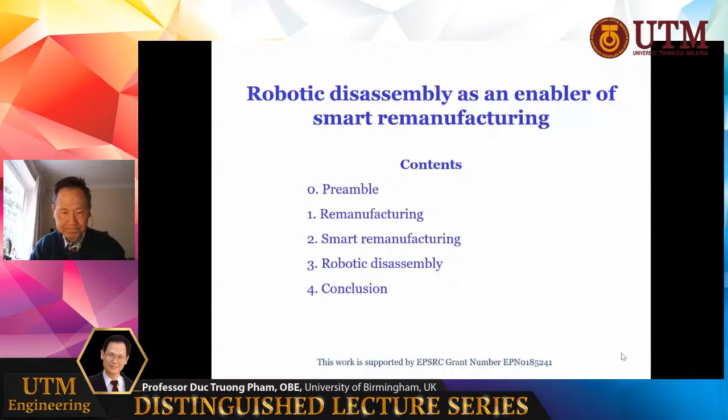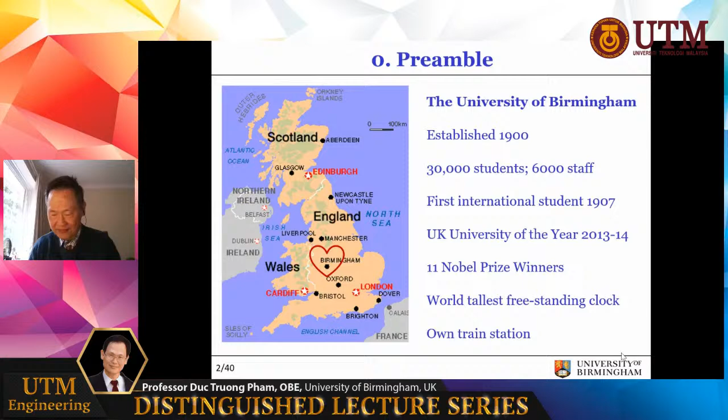So, what is remanufacturing? It is one of our areas of focus because it is a very important area. According to the British Standard, remanufacturing is the process of returning a product to at least its original performance.

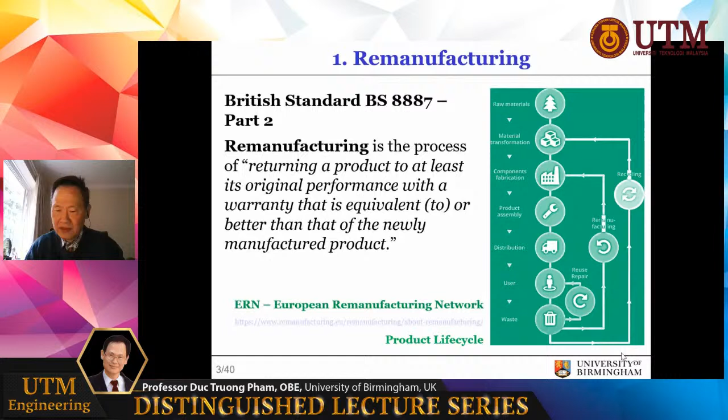Remanufacturing is part of a circular economy, as can be seen in this diagram, which shows remanufacturing forming one of the loops of the circular economy. We are familiar with refurbishing and reconditioning, but remanufacturing is different. Whereas refurbishing is largely aesthetic and reconditioning is about restoring a product to working order, remanufacturing delivers a product that can be considered as new.

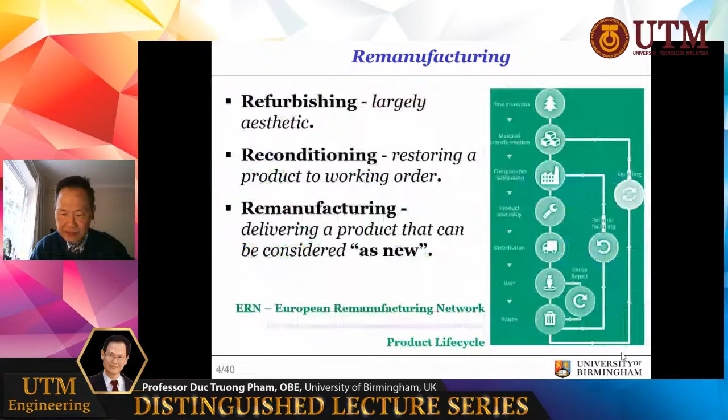Why do we want to do remanufacturing? We want to do remanufacturing because it saves a lot of energy, it saves materials, and it also avoids landfill.

I had a slide, I don't know why it skipped, let's go to the next slide, which explains what remanufacturing consists of. So remanufacturing is a chain of operations. We start with the end-of-life products. We take it apart before we can do anything to it, we have to disassemble it. Then we clean all the components that we have disassembled. We inspect them and we repair those that can be repaired, or we replace those that cannot be repaired. Then we reassemble the product, we test it, and then we have our remanufactured product.

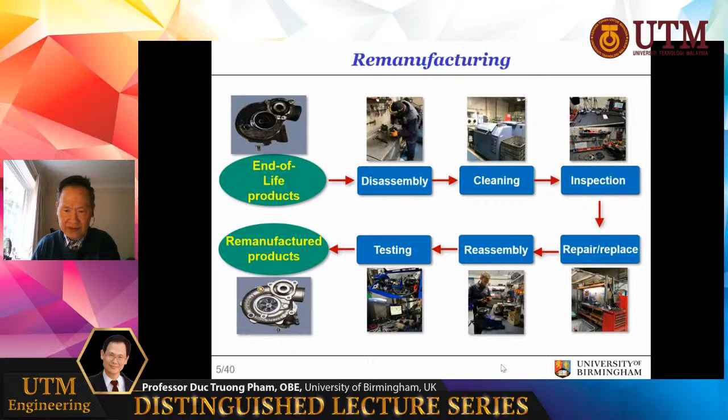So here, this is the slide that was missing. Remanufacturing is very advantageous because, as you can see here, for Caterpillar, who is our industrial partner, remanufacturing cuts down greenhouse gases by 60%, cuts down water usage by more than 90%, cuts down energy use by almost 90%, and cuts down raw materials usage by 90%. What is even more impressive is it cuts down landfill by more than 99%.

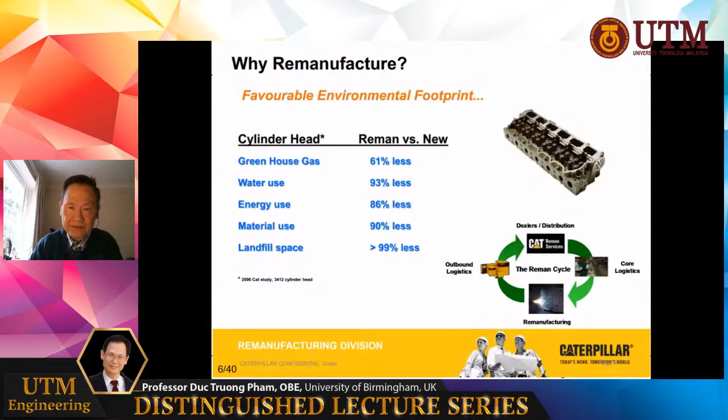Another common problem is uncertainty. This picture shows uncertainty in the condition of the product at the end of its service life. There are other uncertainties, as we shall see later. To overcome uncertainties, we need smart remanufacturing.

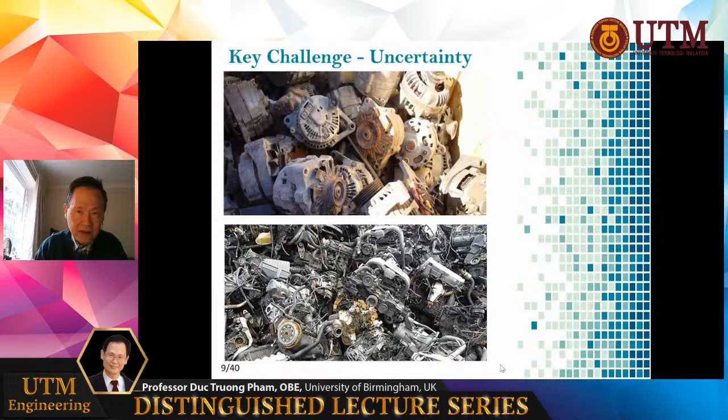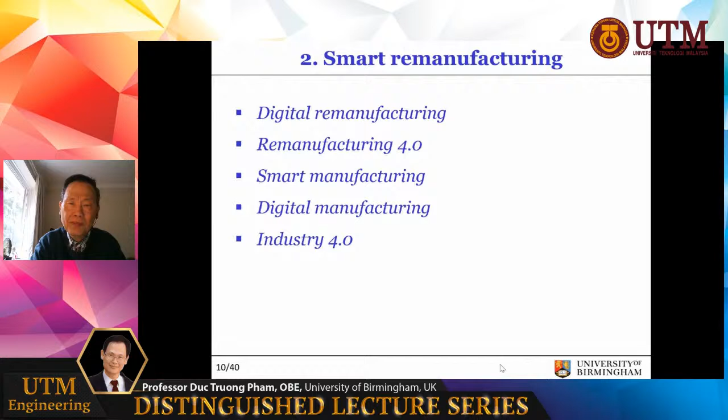Now, you are probably more familiar with smart manufacturing and digital manufacturing, but we also have the equivalent in remanufacturing. So we have digital remanufacturing and smart remanufacturing. Another name for smart remanufacturing is remanufacturing 4.0. As you can see from that name, it is about using Industry 4.0 technologies to make remanufacturing smart.

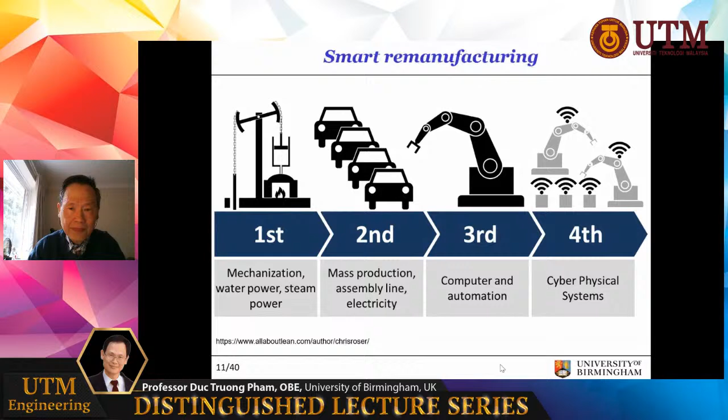So, what are the technologies involved in smart remanufacturing? In fact, they are technologies of Industry 4.0. You will see they include sensors, autonomous robots, cyber physical systems, and the Internet of Things.

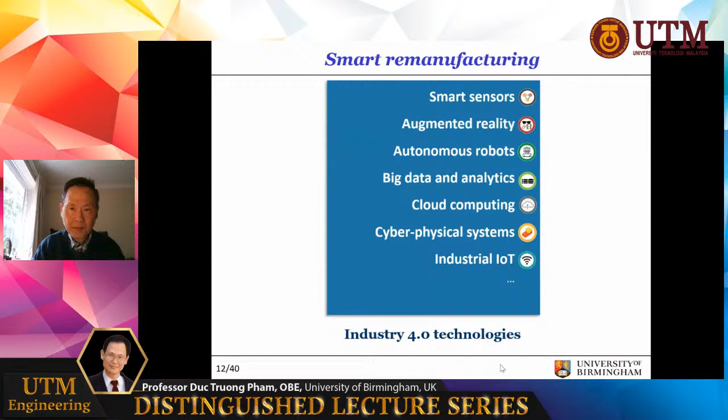So, here are some of the uncertainty problems in smart remanufacturing. They are uncertainties with the supply of the end-of-life products and in the demand for them. There are also operational uncertainties caused by the variable conditions of end-of-life products. Sensing, monitoring, prediction, together with communication and big data and machine learning, can help overcome problems due to those uncertainties.

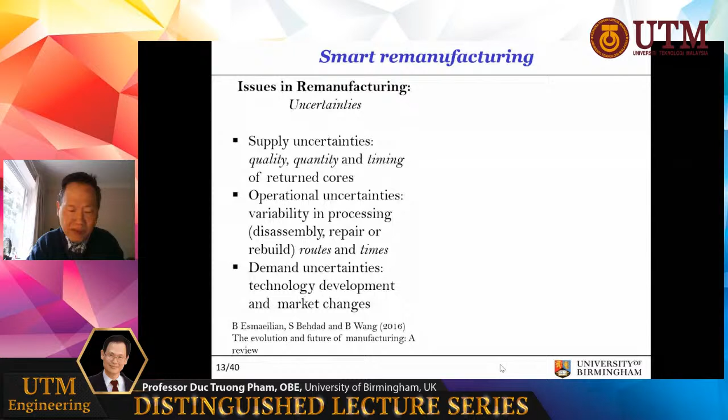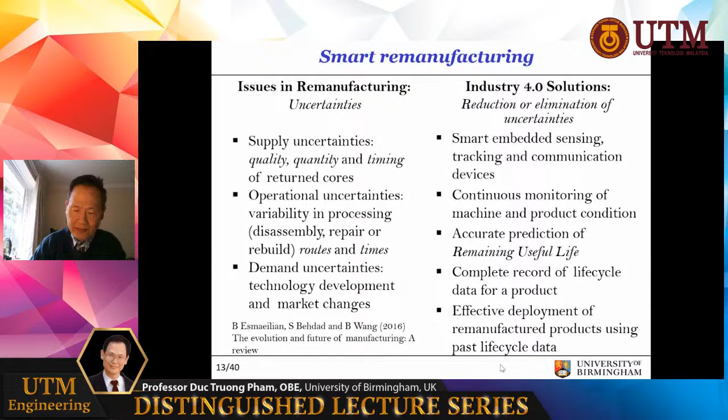So these are the techniques, and you recognize them as Industry 4.0 techniques. There are further issues with remanufacturing, not only uncertainties, but there are these small production batches. So batches sometimes of one made to order, that is not uncommon. Also complications with materials management and resource planning, complex shop floor scheduling and control, and so on.

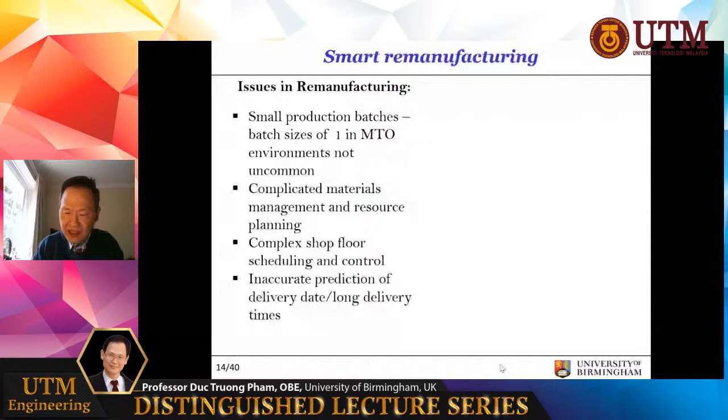And again, we see that technologies of smart automation, smart sensing, and accurate modeling and prediction, these technologies can help overcome problems in remanufacturing and make remanufacturing smarter.

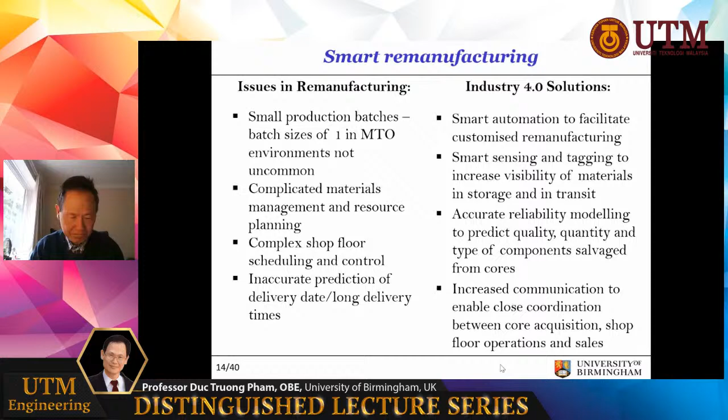This slide summarizes the links between Industry 4.0 and remanufacturing to give smart remanufacturing.

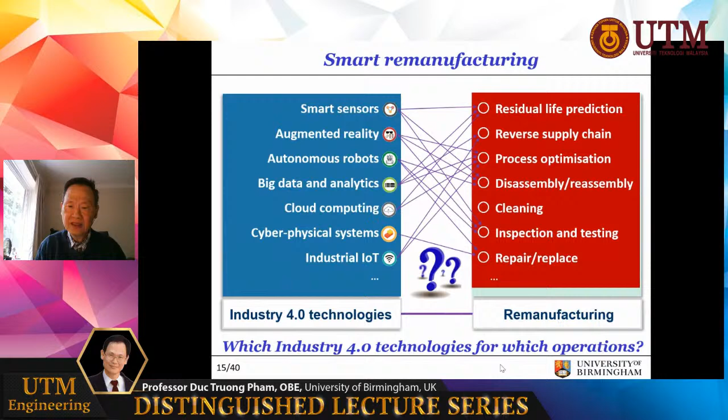The left-hand side lists all the key Industry 4.0 technologies, and the right-hand side lists the areas of remanufacturing that can be made smarter. By applying the technologies on the left-hand side to the problems on the right-hand side, we create smart remanufacturing.

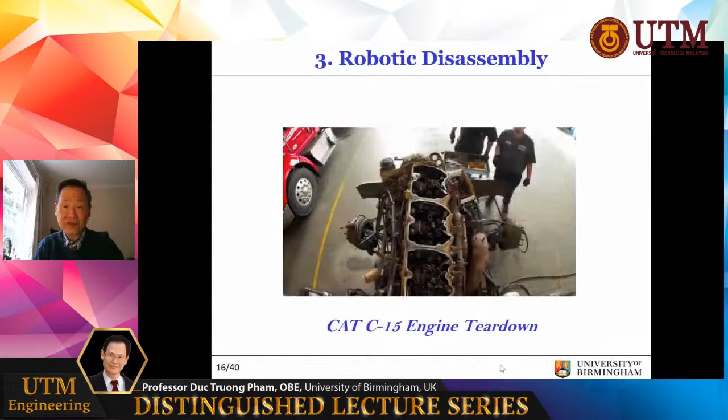Here is a little quiz for you. What does this slide, which comes from Caterpillar, show? It shows the disassembly of an engine at Caterpillar. What does this slide imply? What does it show?

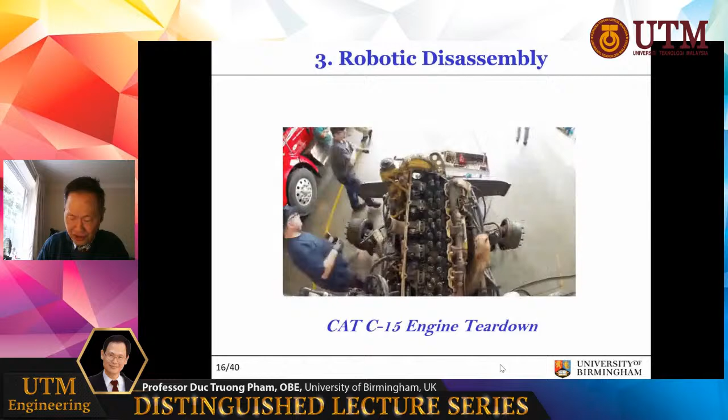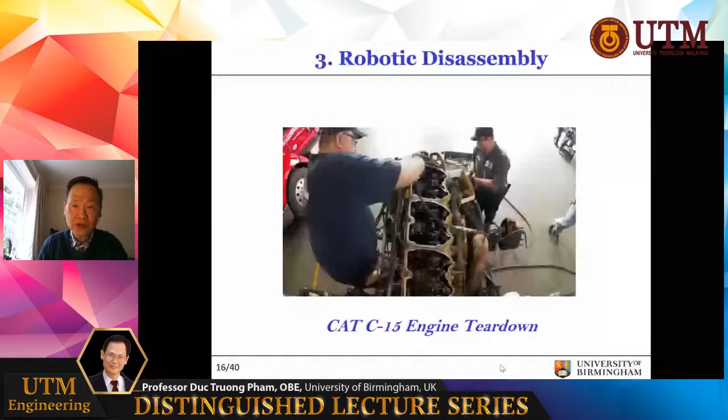Yes, you are right. It shows that disassembly is very labor intensive. It is costly and represents a major obstacle to widespread adoption of remanufacturing because of the cost of disassembly, the difficulties involved, and the problems that require human intervention.

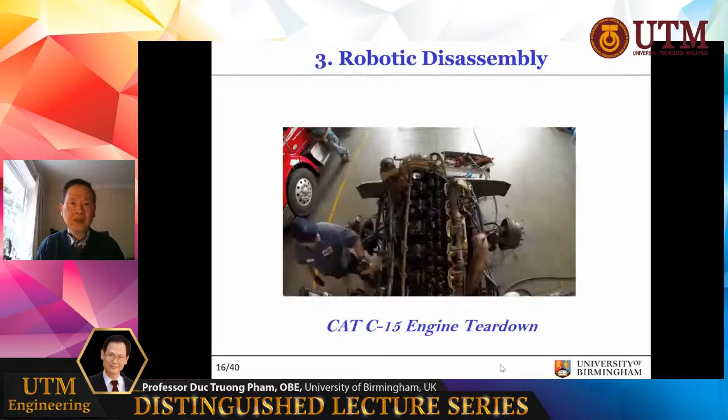So we have been focusing our efforts on this problem of robotic disassembly, in order to create robotic disassembly systems and address this bottleneck in remanufacturing.

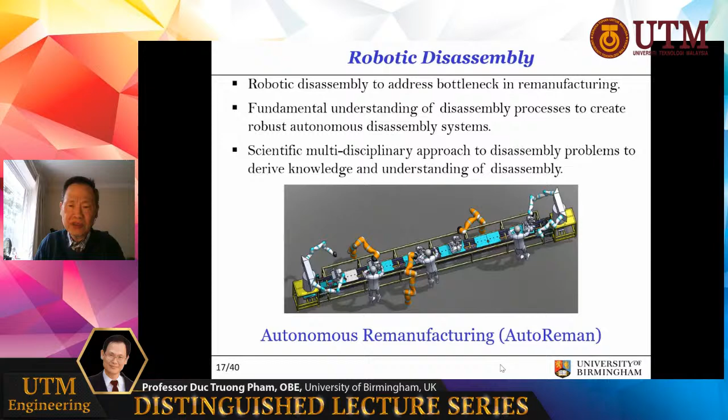We want to understand disassembly processes fundamentally. Our aim is to create robust autonomous disassembly systems that are reliable and can work without fail. Our approach to this problem is to adopt a multidisciplinary approach, involving manufacturing engineering, mechanical engineering, electronics engineering, computer science, and data science, in order to understand the problem and devise solutions to them.

So over the past 5 years, we have studied disassembly science. We study the fundamental disassembly processes to determine the patterns recurring in disassembly problems and the physical and cognitive efforts required to solve them.

With our understanding of disassembly, we devise practical strategies for carrying out disassembly. We also work with partners at other universities abroad on disassembly planning, aiming to develop optimal plans for disassembly in order to save time and cost.

We also realize that disassembly is a complex process. Not all of it can be done by machines, so there is a need to involve people in some cases, and for people to work together with machines. So we have been looking at collaborative disassembly.

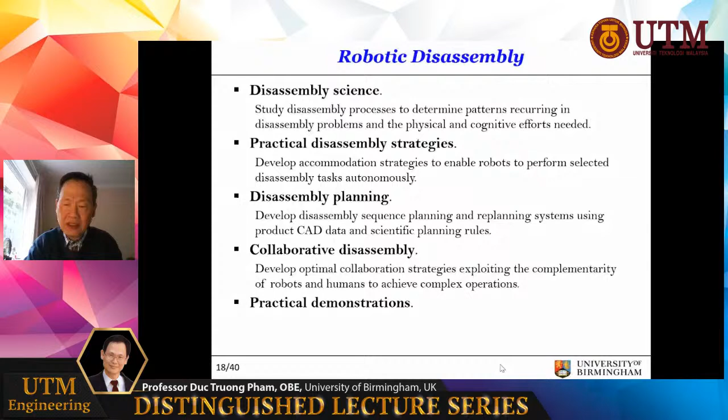And in our work, we have developed practical demonstrations. I'm going to go through all these 5 points. This next slide shows the 5 points again, but in diagrams and pictures.

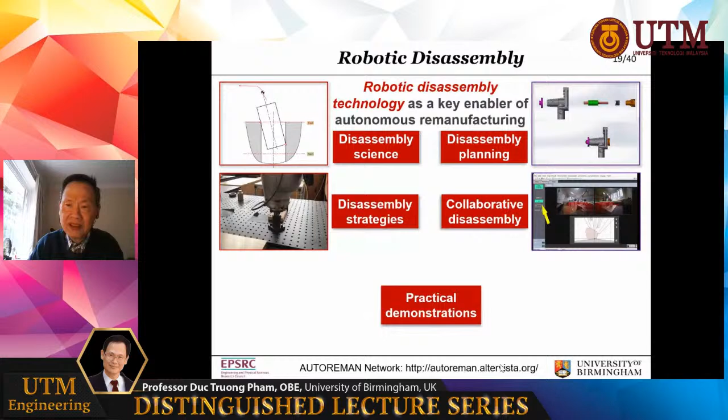Here we look at disassembly science, such as how we remove a pin from a hole or how we undo a screw. We look at disassembly strategies - after we understand the mechanics of the process, we can devise clever strategies for machines to perform them. We look at disassembly planning with our partners at other universities in Wuhan, Spain, and Beijing. We look at collaborative disassembly involving people and machines, and then we implement a number of demonstrations.

So for the rest of this talk, I will describe these various activities.

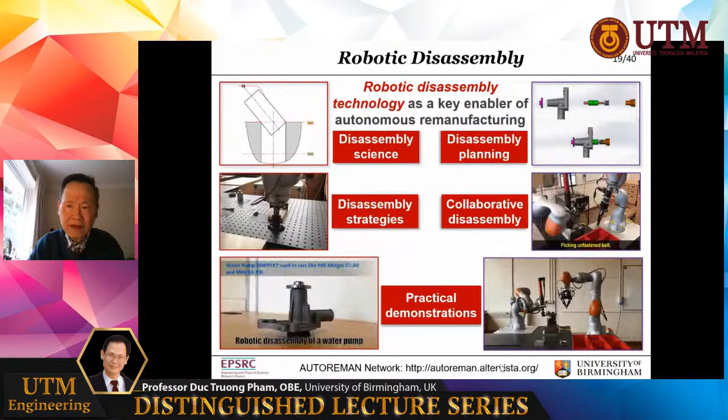Before we carried out our research, we examined a lot of products to find the common disassembly operations. We studied over 400 products and found something like 12,000 operations, which we classified into broad classes. We found that about 40% of them involve unscrewing.

Another 20% involve taking a pin out of a hole - pulling something from a hole. So about 60% are these fundamental processes, and another 40% are different miscellaneous separation processes. We focus our efforts on the 60% of the operations.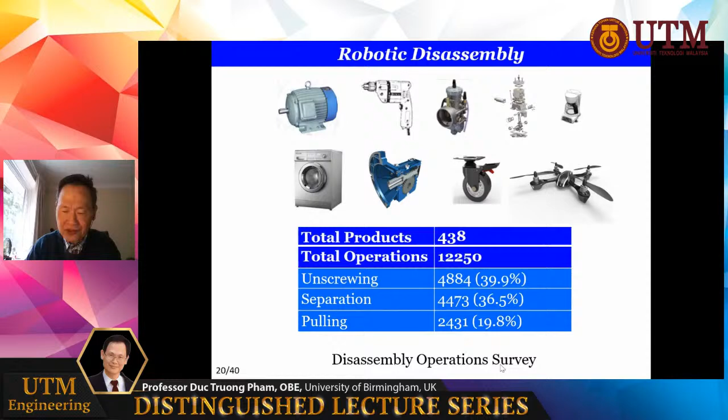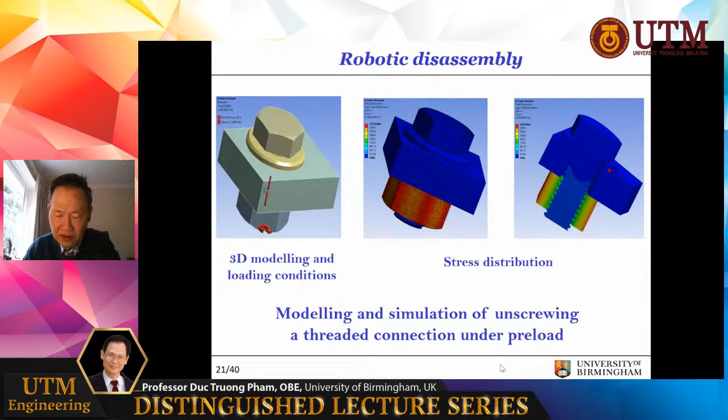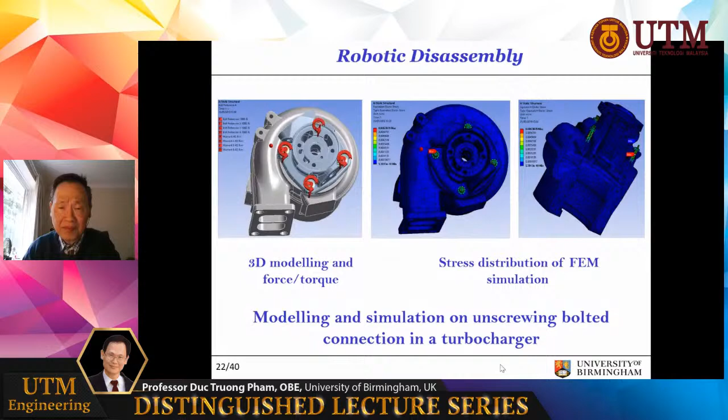We study robotic disassembly of unscrewing operations, using finite element modeling to study the fundamental unscrewing processes. We also looked at the unscrewing of real products like this turbocharger, again using finite element analysis and experiments.

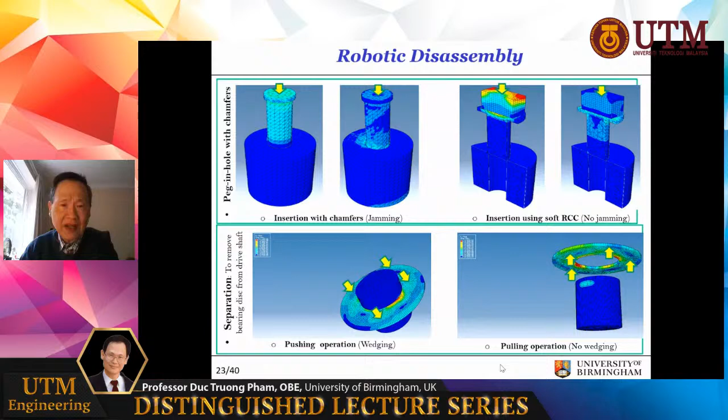We look at the removal of a pin from a hole. This is an interesting operation. When I did my PhD, I studied how to put a pin into a hole; now, many years later, I look at how to take a pin out of a hole. Our colleagues have been studying this process fundamentally, looking at the mechanics of it and also the finite element analysis of the process.

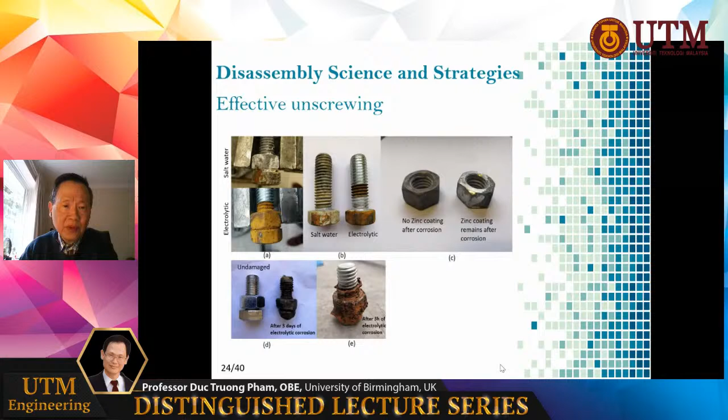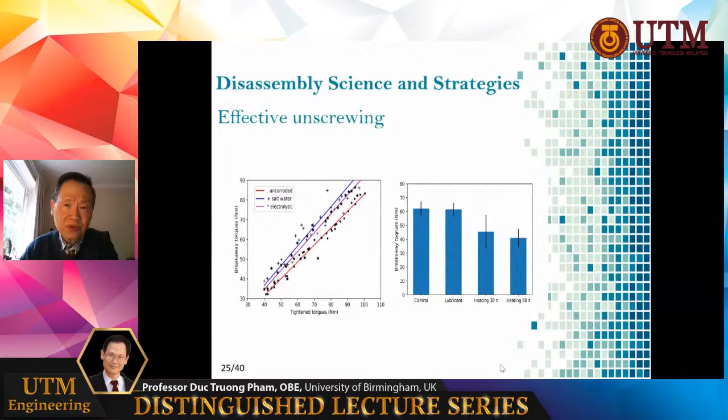At the end of life, many products are affected by corrosion. So we study how corrosion affects screws and the efforts required in removing them, to see how we can overcome this corrosion - how much extra torque we need to apply in order to remove screws and nuts that have been corroded.

Now, when I did my PhD, we looked at compliance as a strategy for helping assembly. So now we look at how compliance can help disassembly. We have written an interesting article on this, which I can share with you if you are interested.

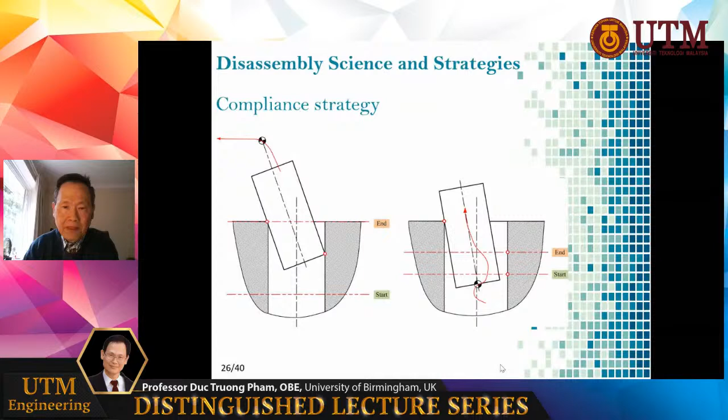We have implemented this in real experiments, using a combination of passive accommodation and active compliance. This robot uses active compliance, and at the end of the robot there is also a passive compliance device to help it perform the disassembly process.

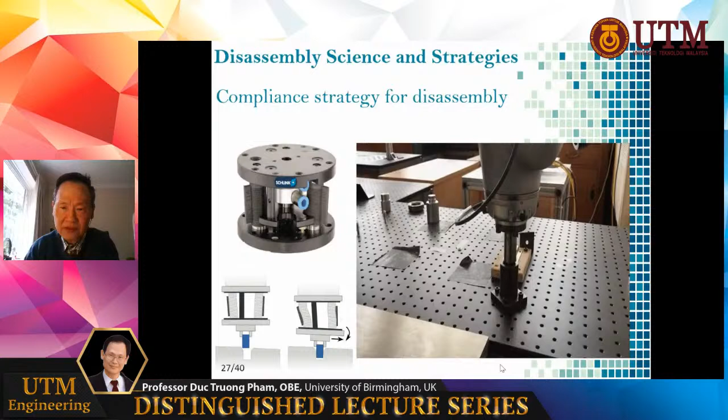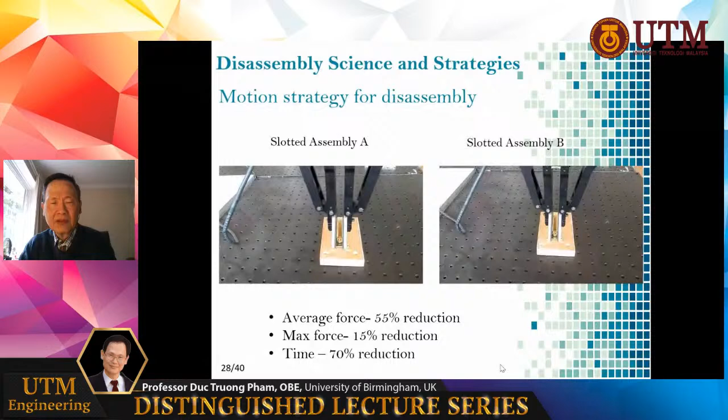Here we study a different disassembly problem: the removal of a latch from a slot. You can see on the left-hand side, the robot uses compliance alone.

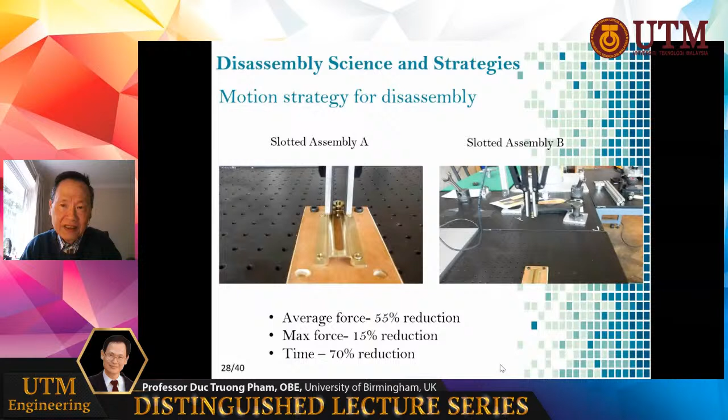Although it succeeds in the end, it performs the operation much more slowly than on the right-hand side. In case B, the robot started later and finished earlier. The difference is that the robot in case B uses compliance as well as vibration. So we study the use of vibration to reduce the forces in disassembly and also the time required.

Yeah, so the demonstration showed that.

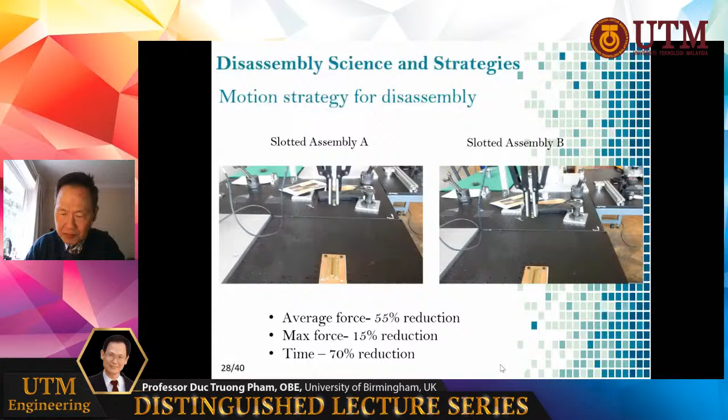As I mentioned before, one of our activities, a very major part of our work, is to study disassembly planning. So here is a very simple disassembly, the disassembly of a water pump.

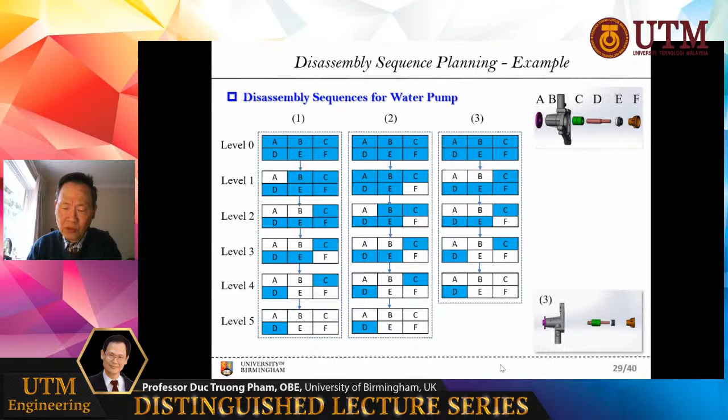We study different plans for disassembling this pump. This is the first plan, this is the second plan, and the third plan is shorter, so it saves time. For this simple process, the time savings are not major, but if you have a complicated disassembly, an optimal plan can save a lot of time. So we are looking at the use of optimization to devise optimal disassembly plans.

We have built a demonstration disassembly cell. In this case, the cell is used to disassemble the water pump you saw earlier. There is a video of this cell performing the disassembly of a water pump. You can see that the cell consists of two robots, which are collaborative robots, a human operator, and peripheral equipment.

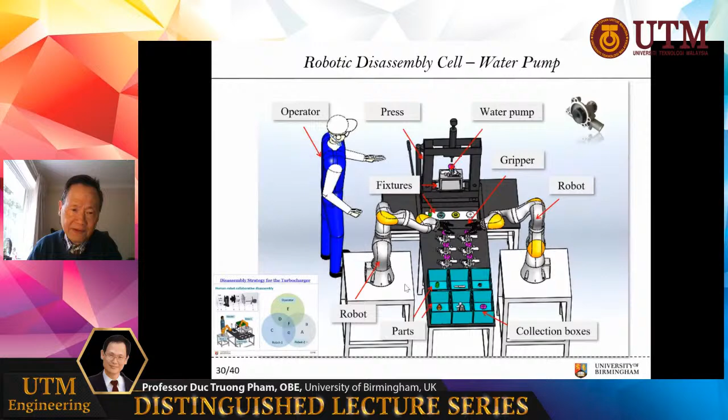For this presentation, I will focus on a different demonstration. So here is the disassembly cell again, but reconfigured for the disassembly of a turbocharger, a slightly more complex operation.

In this case, I show the human-robot collaboration at work. You will see that during the operation, there will be some tasks that the robots cannot perform, and the human comes in to perform those tasks. So here you have the operator performing some tasks. Some tasks are done in common with the robots, some tasks are done by one robot, and some tasks are done by the other robot.

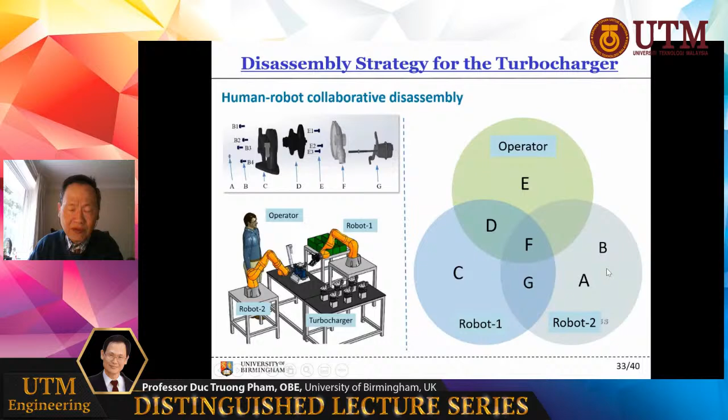So I have a short video of about three minutes to show you now.

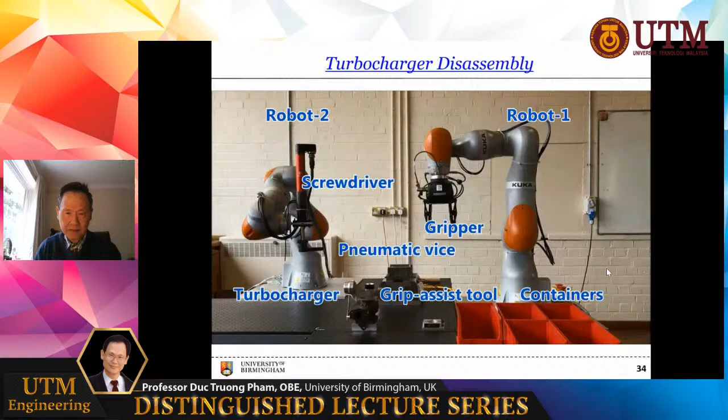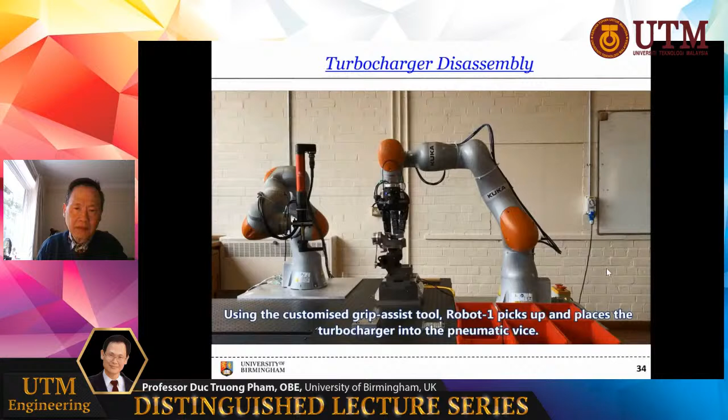So the operator comes in. The turbocharger is picked up by one robot and put into a clamp.

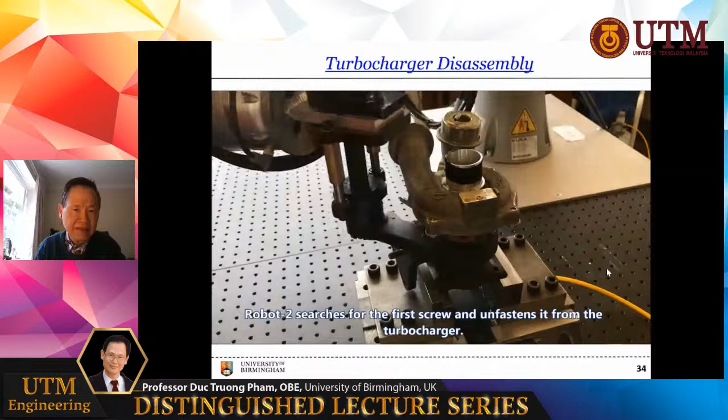The second robot performs the disassembly, the unscrewing operation. So unscrewing is being performed. The robot has to search for the location of the screw. Now unscrewing is happening.

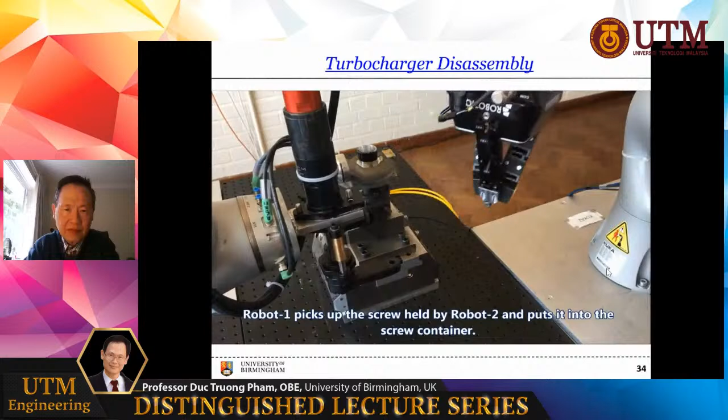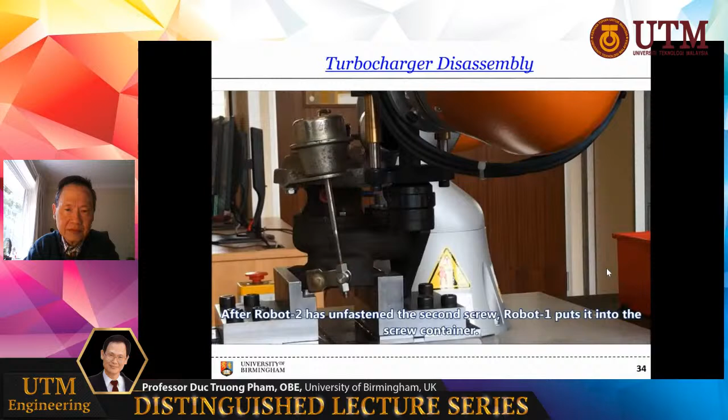The robot uses force sensing to search for the screw. You can see the searching operation again. So the unscrewing happens now.

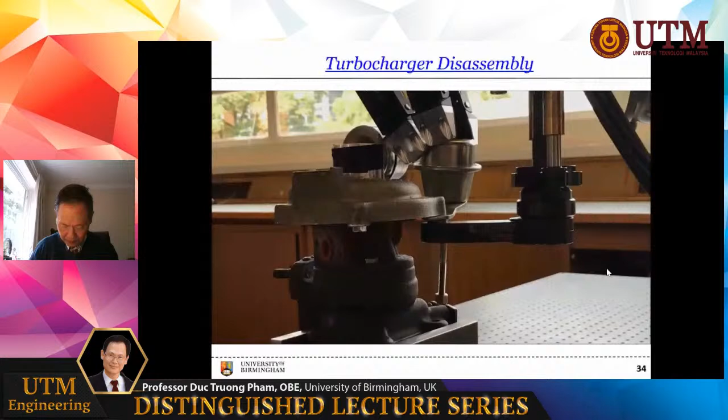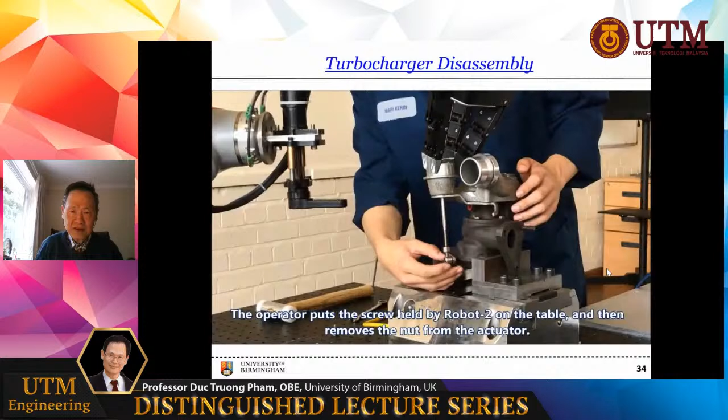So the human operator comes in and performs some operations that the robots find difficult to do.

In this presentation, I have briefly explained remanufacturing, then talked about smart remanufacturing, and then focused on robot disassembly. Remanufacturing is economically, socially, and environmentally beneficial. Before any other operation can be performed on an end-of-life product, it must be disassembled.

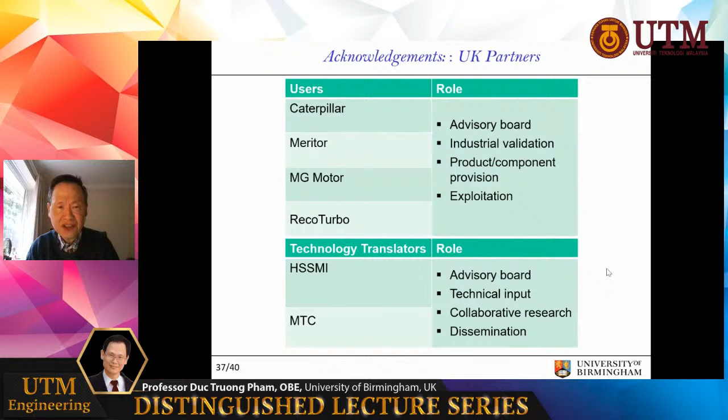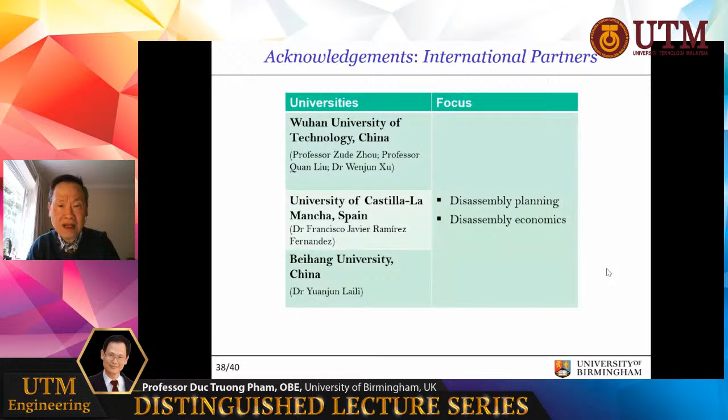We would like to invite you to join us to achieve the aim of widespread remanufacturing.

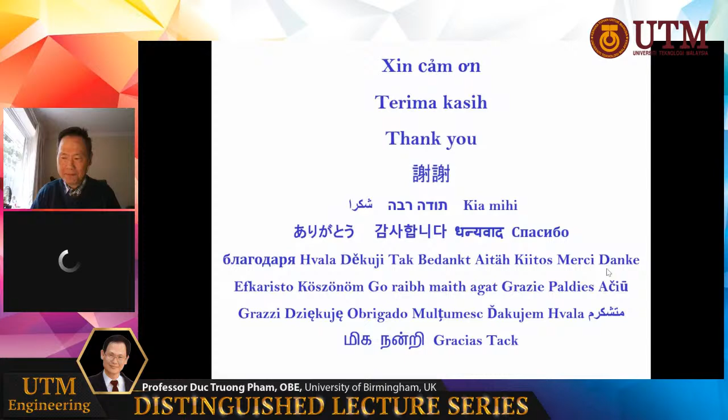Okay, terima kasih, Prof. Now you learn bahasa. Okay, thank you. Thank you very much. Thank you very much, Prof.